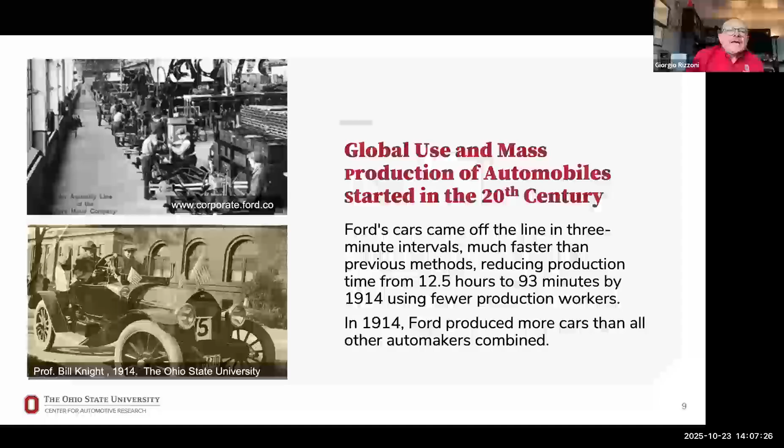Electric vehicles, back then in 1914, were actually not a new idea. First electric vehicles were demonstrated in the early 1880s. You see here some drawings. I'll show you some photographs in a moment, but you see some drawings here of the two earliest electric vehicles.

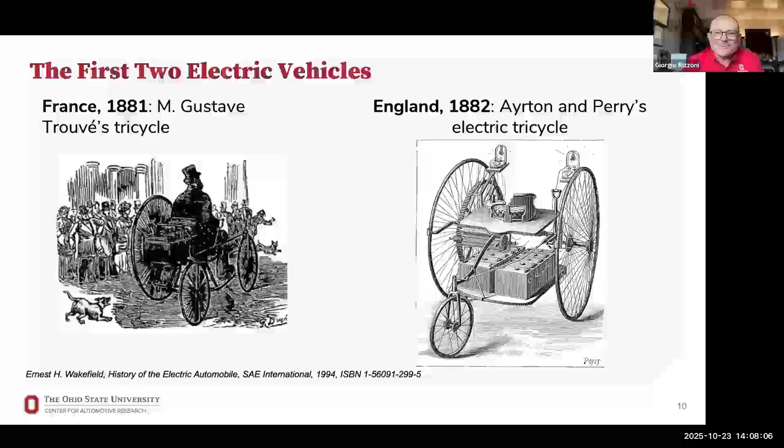And if you look at the one on the right-hand side, you can see that the tray of batteries on the bottom of that tricycle looks an awful lot like the lead acid batteries that serve as starter batteries in conventional automobiles today. Some of this technology has not changed that much over the years.

Electric vehicles moved on and were quite successful for a number of years. When you look at the early 1900s, the first two decades of the 1900s, it was probably just as common to come across an electric vehicle on the road as it was to see an internal combustion engine powered vehicle.

Here are some companies that lived probably for the span of at least a couple of decades. Baker Electric in Cleveland, Ohio, Detroit Electric, of course. And here is a picture of the Columbus Electric, based here in Columbus, Ohio, where I live. Actually, it turns out the address of this company, 561 Dublin Avenue, is not very far at all from where I live today. So in the early 1900s, electric vehicles were quite common.

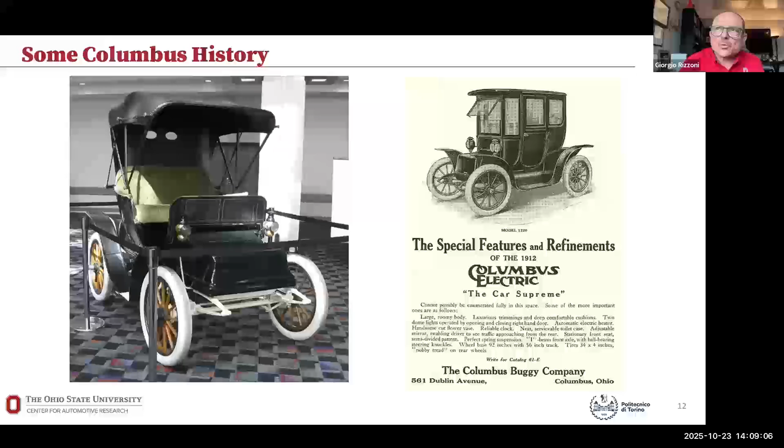What happened? How did they disappear? Well, first of all, if you look at statistics from 1913, you could buy a gasoline engine automobile for about $1,000, maybe even less than $1,000. Whereas an electric car would run in price somewhere in the neighborhood of $2,000 to $3,000. So it cost 2 to 3 times as much.

But at the time, electric vehicles were far more reliable and easier to operate. I don't know how many of you have ever operated a hand crank start for a combustion engine, but until the invention of the electric starter, operating an internal combustion engine powered car could be a bit of an adventure. They were also not very reliable.

But what happened was that in the 1910s, technology related to internal combustion engines, their reliability and their efficiency, and the availability and distribution of liquid fuels, gasoline, liquid hydrocarbon fuels, improved to the point that for the next many decades, internal combustion engine powered vehicles really dominated the market, and they were the more affordable, reliable, and effective means of transportation.

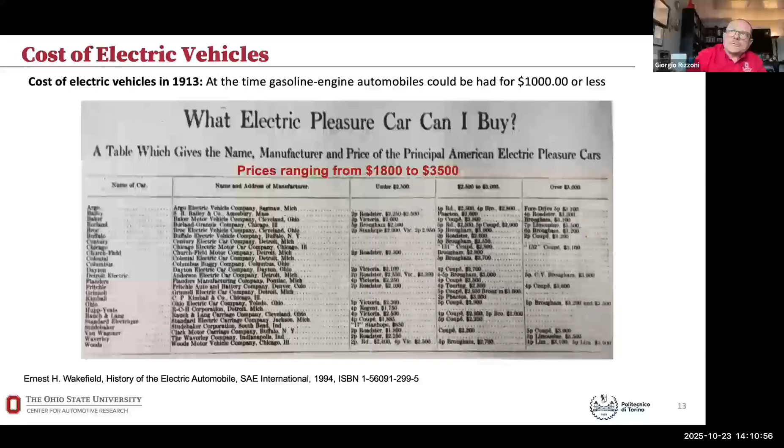So this is a little bit of the history, and of course you know that over 100 years later, today you can buy a battery electric vehicle, you can buy a hybrid electric vehicle. There are many different options available to you on the market, but for many decades, the gasoline-fueled internal combustion engine was the dominant force. Let me change topic now to the subject of energy.

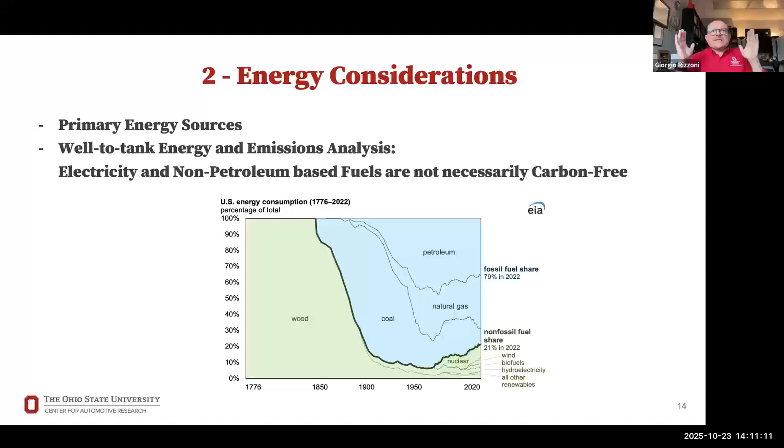Transportation, as you will see in a moment, is the single largest sector of our economy in its energy usage. And if you think about it, to provide the propulsion power that is needed for a vehicle, on one hand, you need a propulsion system of some kind, but you also need to store energy on board the vehicle.

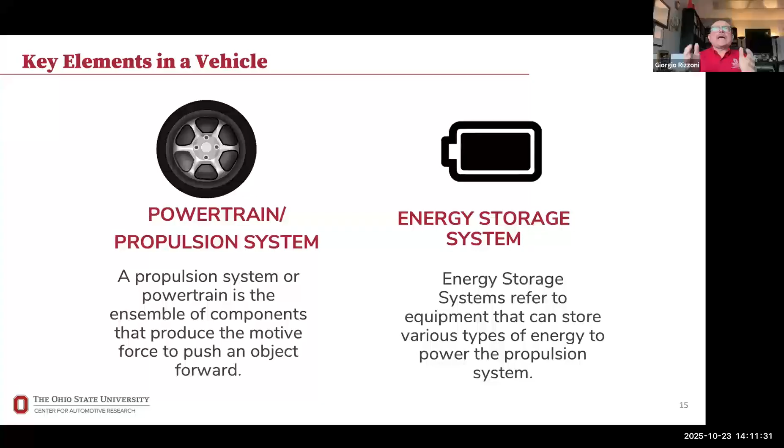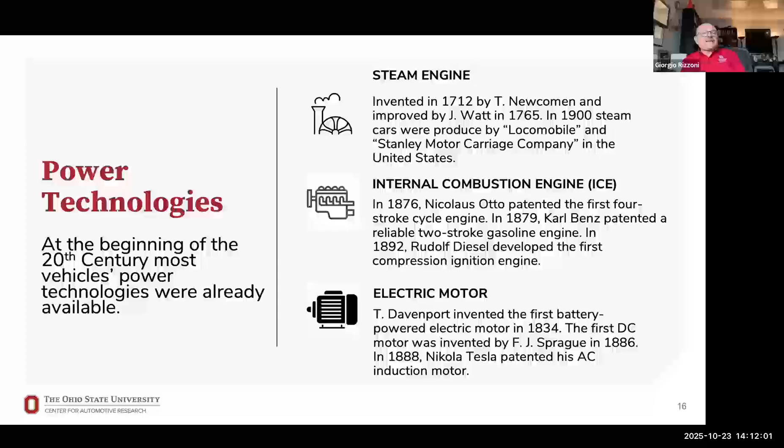And in the world of the early 1900s, late 1800s, engineers understood the steam engine. There were, by the way, in the early 1900s, steam engine powered cars as well. They were not as successful as the internal combustion engine and electrically driven cars, but they existed. The internal combustion engine has been around since the late 1800s, electric motors even longer than that.

And the energy storage technologies that exist today and existed also at the turn of the previous century were either liquid fuels for the combustion engines or electrochemical batteries. Both of these technologies have also been around for quite some time. Batteries were initially discovered at the beginning of the 19th century, actually.

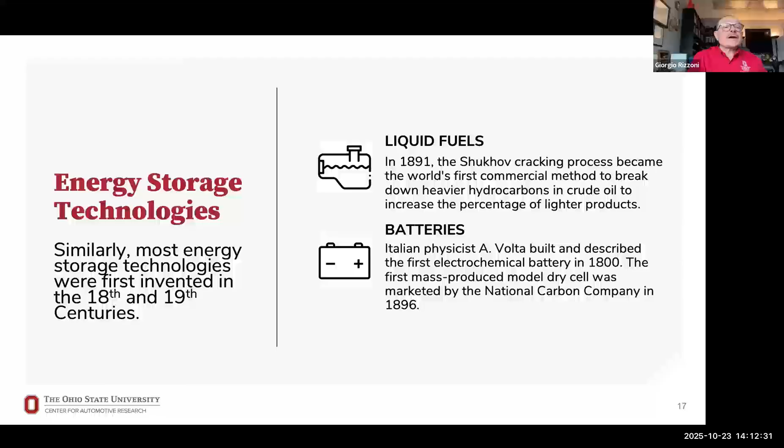So what is this energy storage or fuel for transportation? What characteristics are we interested in? Well, we need two things in an energy storage system for transportation.

We need to have the ability to store energy, and that is related to the range of the vehicles. You fill up your tank. My car has probably about a range of 500 miles on gasoline. A battery electric vehicle today, they're advertised as having a range of 300 miles.

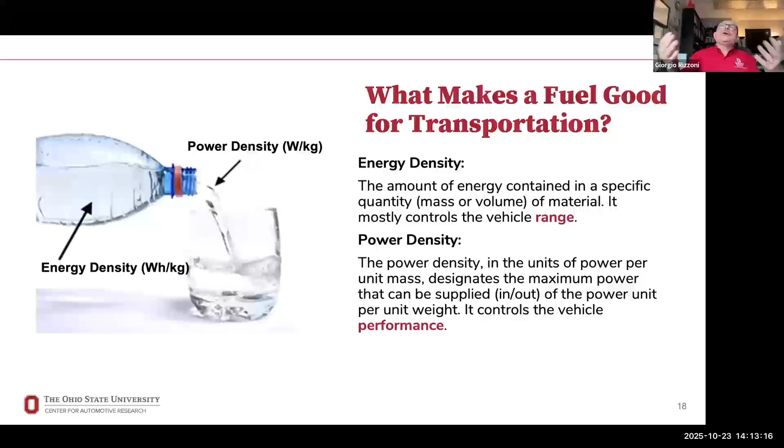But you're also interested in power density, which is related to performance, the ability to transform the stored energy into power that can deliver motion. So it's worth spending a minute on understanding the significance of energy consumption in the United States.

If you go back and look at the history of energy in this country, and any industrialized country would have similar evolution. In 1776, everything we did was based on a single sustainable biofuel known as wood. We used it for heating, for cooking. There wasn't much use of energy for transportation other than that available from wind or from animals, horses or oxen.

In the 1800s, we went through this industrial revolution, and coal became a far more attractive material for providing energy storage and for converting this energy into power. So steam-powered ships, trains, and other industrial facilities could take advantage of coal, and this led to what we think of as the Industrial Revolution.

But if you see what happens here, at some point in the early 1900s, petroleum and associated with it natural gas came to be a very important part of the energy supply for industrial applications, but especially for transportation. Today, we live in a world in which fossil fuels, petroleum, natural gas, and to a decreasing extent coal, represent close to 80% of the total energy supply in the United States, and non-fossil fuels represent about 20%.

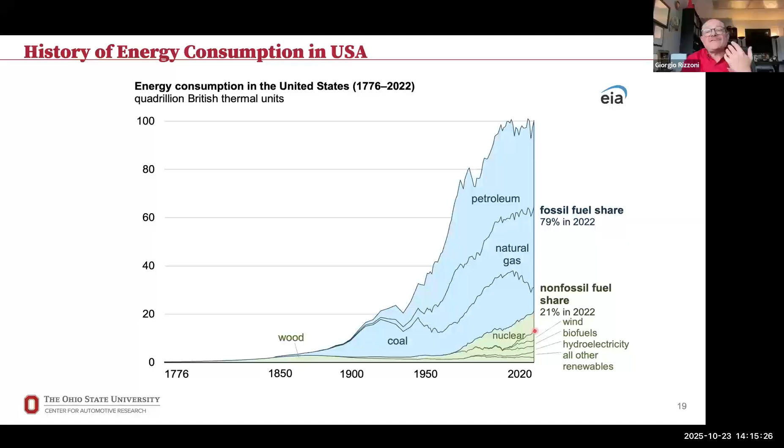And a big part of this in the United States is nuclear power. Then you have all of the different renewable energy sources. I'll show you a snapshot of the same information in percentage instead of absolute units to make the point that we went from the wood age to the coal age to the petroleum age. And today we are still in the petroleum age. I'll show you some numbers that illustrate this more clearly in a moment.

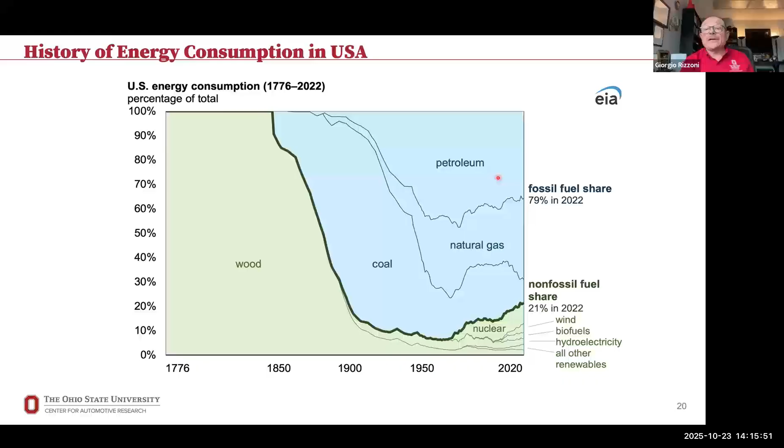So if petroleum has fueled transportation for 100 years, but we would like to move away from fossil fuels, from these liquid hydrocarbons that produce carbon dioxide emissions, what is our alternative option? Well, there certainly has been a lot of talk about electricity as an alternative to petroleum-based transportation.

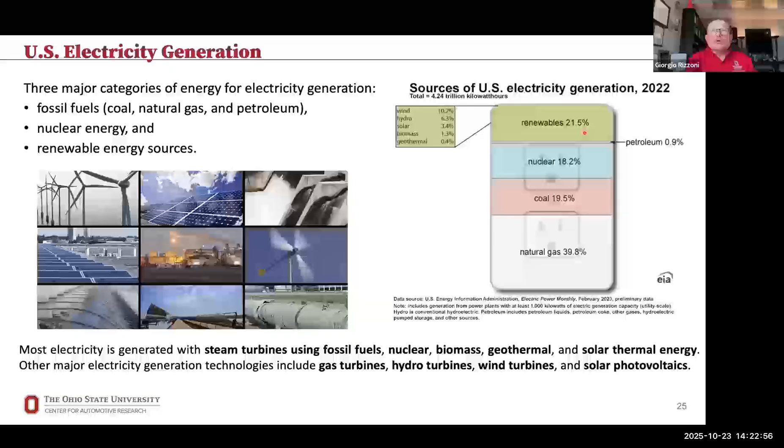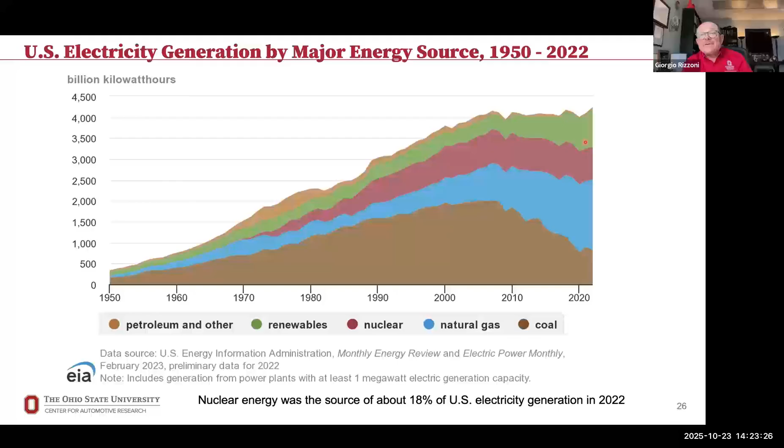especially natural gas-fired power. Here is another look at the same information over the time span from 1950 to 2022, where you can see that natural gas has grown significantly, coal has been reduced significantly, nuclear has been pretty steady over the last 30 years or so, renewables have been increasing, but this increase, again, represents only a fraction of the total.

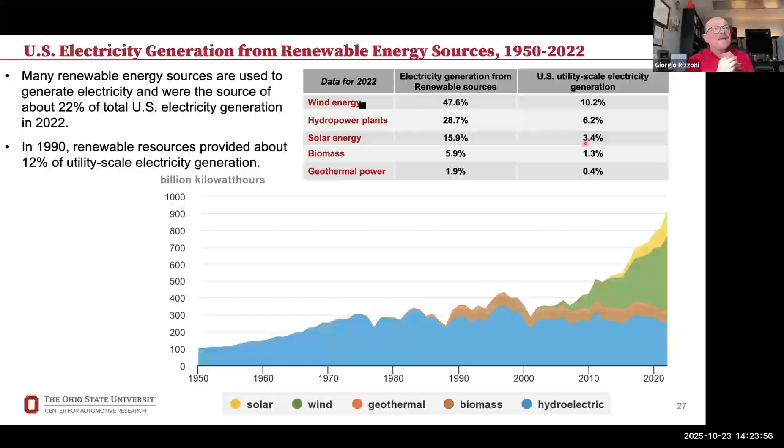So even though renewable energy production is increasing at a reasonable pace, it's still representing only about a fifth of the total energy production in the United States, which means that the day when we can think of electric vehicles as being completely disconnected from fossil fuels is not here yet. We're making progress in that direction, but we're not here yet.

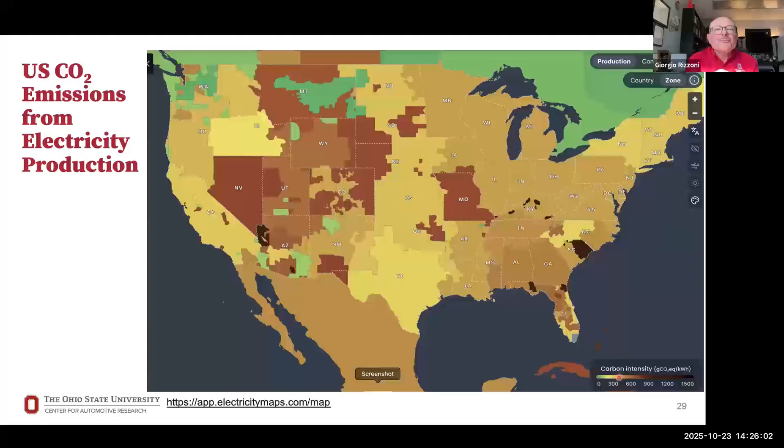So here you are in Illinois, and here I am in central Ohio. We're not too far. It's about a 4-hour drive. And we are, roughly speaking, in the same position. We are beige states. We're somewhere in between here. Not too bad, not as good as we would like to be.

And what is important to understand here is, and I picked my region, PJM Interconnection is the nonprofit company that is responsible for electricity transmission in our region. Illinois falls within MISO, an adjacent region. ISO stands for Independent System Operators. These are nonprofit organizations that manage the buying and selling of electric power, right?

And if you look at the region that comprises Ohio, West Virginia, Pennsylvania, and parts of the East Coast, you'll see that nuclear, natural gas, and coal, with a growing percentage of wind, represent the overwhelming majority of electric power generation. So why is this important?

You may have at dinner time conversations with your friends and family, someone may have asked you, hey, you're an engineer, you work in transportation. Tell me, is it really true that electric vehicles are zero emissions? And the correct answer to this question is the answer that I always recommend my students use as a first defense, which is, it depends. It depends on where you live.

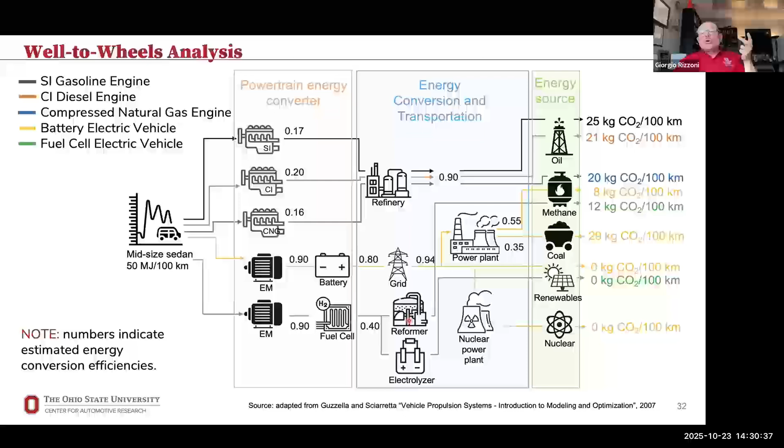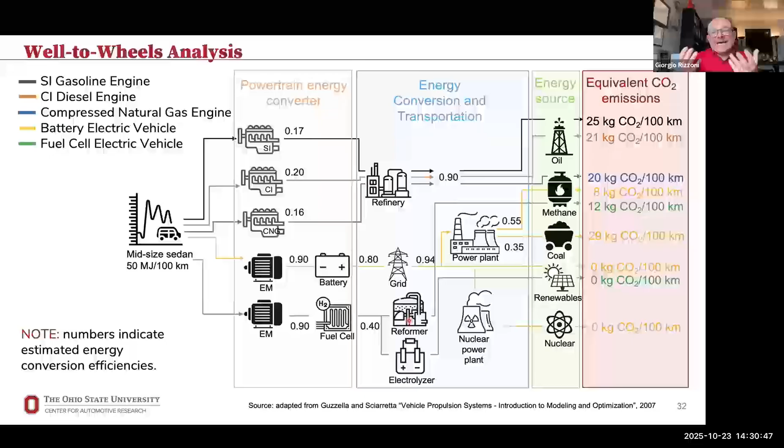And then you need to think about what's the energy source. Is it petroleum? Is it methane? Is it coal? Is it renewable power? Is it nuclear power? And then each of these has some equivalent CO2 emissions. So the answer as to what emissions are associated with a particular form of energy conversion for transportation is not a simple answer. You have to ask a lot of questions about where the fuel came from and how it's been utilized.

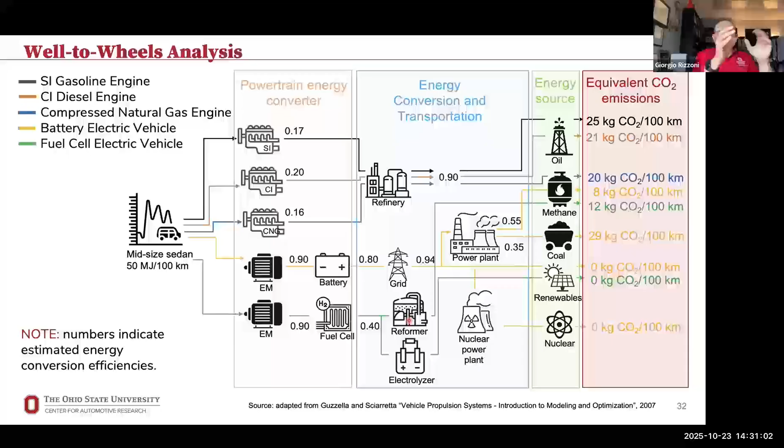This business of understanding the energy and fuel cycle and the vehicle energy consumption that leads to the tailpipe emissions. And by the way, when people say electric vehicles are zero emission vehicles, well, what they really mean is they're zero tailpipe emissions vehicles, because of course there are emissions associated with producing the electricity.

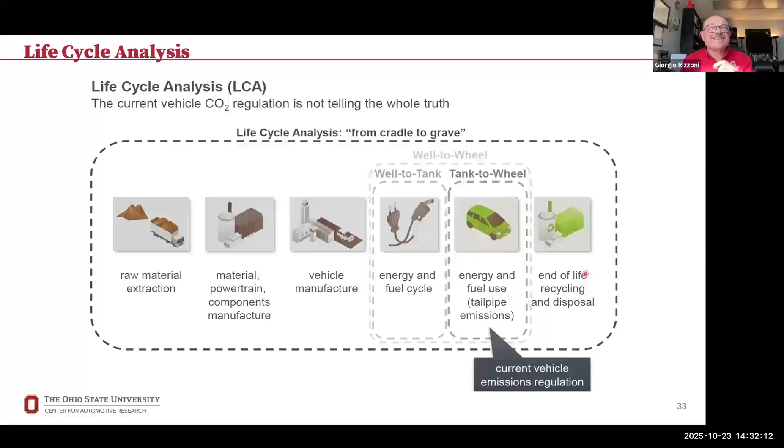But that's not the complete story, because there is energy that goes into manufacturing the vehicle, into manufacturing the components, into extracting the raw materials, and also we need to deal with the end of life, reuse, recycling, disposal. So life cycle analysis is a discipline that is quite complex, that takes into consideration all of these different aspects. So my message is the next time someone asks you at dinner time, what about the emissions of electric vehicles, make sure you remember my suggestion. It depends is a very good starting point for the conversation.

This is one of the reasons why internal combustion engines are still with us. And I think they will continue to be with us for a very long time, especially in applications like aviation, where you do need very high energy density to enable an airplane to cross an ocean, for example, or long-range truck transportation, for example.

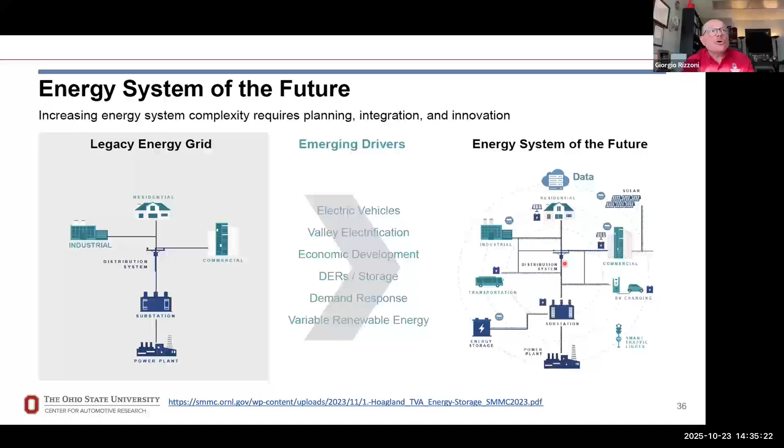We are moving in the direction of increasingly distributed energy systems. By that I mean that instead of having the simple system, you have a power plant sending electricity to a substation, you have a distribution system, and then you have commercial, residential, industrial applications. Now you're moving to a more distributed world in which you will have distributed energy resources, and you're going to have much more flexible distribution systems that allow us to actually broker the transfer of energy from one application to another in a much more flexible way. And energy storage is going to become a very important part of this.

I will also make some comments about, remember that petroleum ends up being the single largest component of the primary energy supply. So we live in a world in which petroleum is produced in certain parts of the world. These are the supply regions. And then you have consumption of this petroleum. Where? Well, if you look at vehicle density and population density, East Asia, Europe, and North America are the largest consumers. They're the regions where there is the most demand.

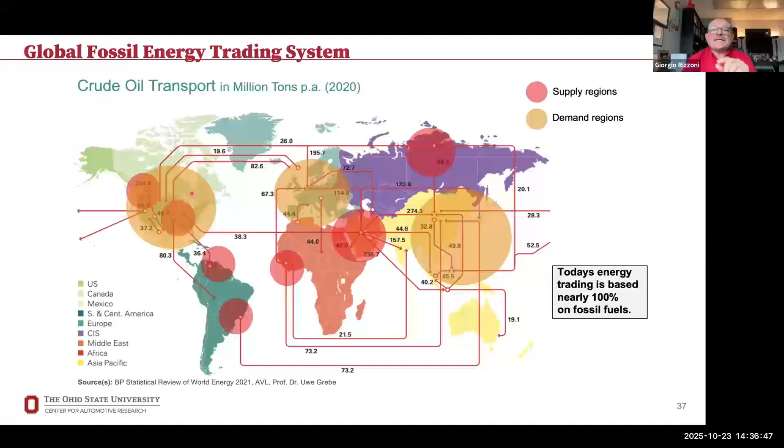And there is an amazing amount of energy trading that takes place in the world today that is mostly based on fossil fuels, ships, pipelines, and let me give you a number. Today, the world consumes 100 million barrels of petroleum every day. 100 million barrels of petroleum per day. And this petroleum may be coming from the other side of the world, and it comes to us on oil carriers, right? Or it's shipped by pipeline from Canada, for example, to the United States, or from Russia to Europe. So this idea of having a system that is based on the transport of liquid fuels is part of our world. That's what we depend on.

Could we imagine a global energy trading system in the future in which you will have the production of energy that uses sustainable energy carriers, not fossil fuels anymore? And I'll give you an example in a moment, but are there regions in which there is a lot of sunshine, a lot of wind? Could we make a lot of energy with renewable energy sources and somehow trade it? Well, a big challenge. This is not an easy thing to do. The demand regions are the same, the USA or North America, Asia, Europe. But now the supply regions could be different. They could be regions that have a lot of sunshine or a lot of wind.

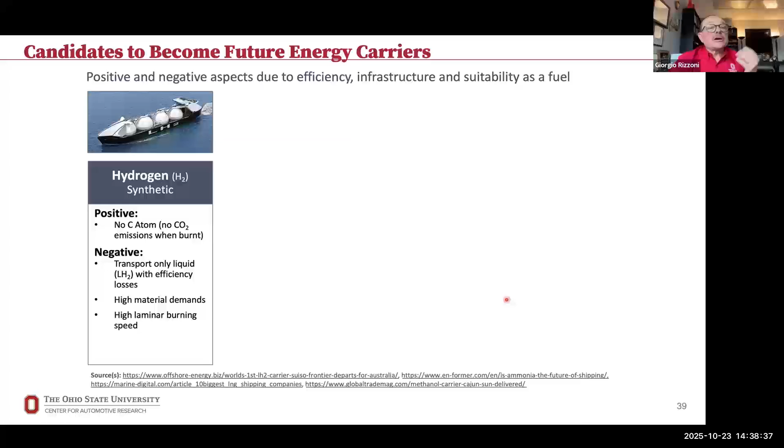Could we imagine having the production of green molecules, that is, of liquid fuels or gaseous fuels that are not based on fossil fuels, but are produced in a renewable way? So e-fuels, I'll describe this in a moment, ammonia, e-hydrogen, that is green hydrogen, are potentially these fuels of the future that are still chemically bound in molecules that allow you to move them, especially with liquid fuels, more easily. So you could imagine shipping synthetic hydrogen made somewhere in the Sahara Desert, for example, where there is a lot of sunshine, using solar power to do electrolysis for producing hydrogen.

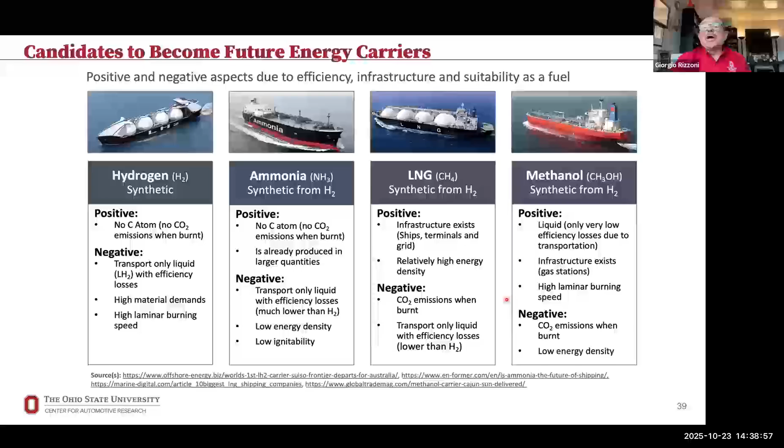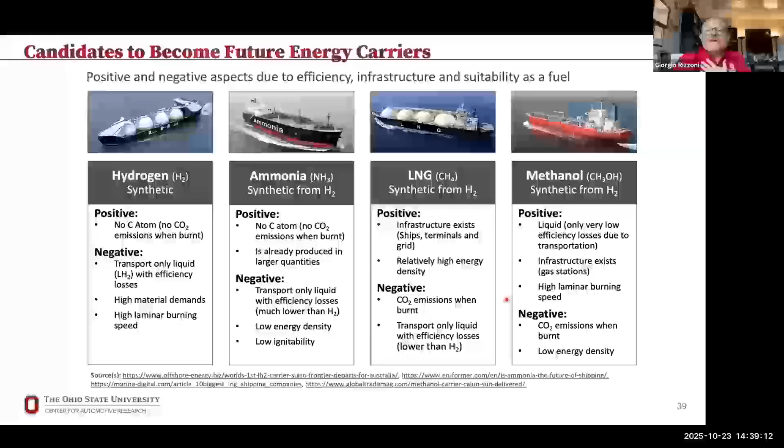Some people believe in ammonia. I'll admit that that's a difficult fuel to handle, but ammonia is a liquid carrier of hydrogen. Liquefied natural gas, where the natural gas is a biogas or synthetically produced from hydrogen, or methanol, which is the lightest liquid hydrocarbon, CH3OH, that can be produced. And it's liquid, so all of the liquid carriers, the oil tankers that we use today, could be carrying methanol. And so you say, wow, this is a nice dream. Could this possibly happen? Might I be able to supply a net zero carbon liquid fuel to airplanes that cross the Atlantic Ocean?

Well, Siemens Energy and Porsche teamed up with the government of Chile. It turns out that the southern tip of Chile, Patagonia, is the windiest part of the world. And what they've been doing there is using this wind power to produce green hydrogen from electrolysis. So you need water close to the coast. You need lots of wind to produce clean electric power and carbon capture.

So imagine capturing carbon from the atmosphere, synthesizing this carbon with hydrogen that is produced by a green energy source, and synthesizing this into a liquid fuel. And methanol would be the easiest product, but methanol could be refined into a designer gasoline.

So I believe that as we go forward, we will see more and more emphasis on substituting these liquid e-fuels for petroleum so that we can continue to use liquid hydrocarbon fuels in difficult applications like aviation, agriculture, construction machinery, long distance trucking, while at the same time translating a lot of the internal combustion engine powered local transportation in urban areas, small package delivery, passenger cars into electric vehicles.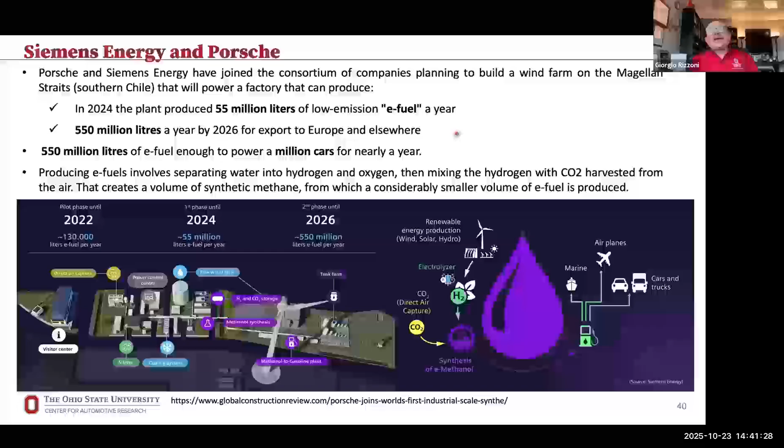I think that in summary, we need engineers who are capable of doing life cycle analysis, who are capable of doing the chemical engineering and synthesis of these e-fuels and contribute to the design of an increasingly renewable energy focused electric power generation system.

Yeah, that's a good question. Let me go back to that slide. Excellent question. Someone is paying attention. This is a question that has plagued me before when I have given similar presentations. I'll explain why. So, first of all, rejected energy is related to energy losses. That is, the laws of thermodynamics are what they are. We cannot change them, right? So every energy conversion process leads to some losses.

Let me give you an example. I make electric power from a natural gas-fired power plant. Well, the combustion process is not 100% efficient. So I put natural gas that corresponds to a certain amount of energy, megajoules per cubic meter, for example, and not all of that energy becomes electric power. Then this electric power, I have to transform it from low voltage to medium voltage to high voltage. Well, the transformers have losses too. And so every step of the way, I lose some of the original energy. So that's the rejected energy.

When you look collectively at all the losses, think about your home, okay? If you live in a home that has very poor insulation, your heating costs are much higher, but you're also using a lot more primary energy to heat your home, right? So one of the messages in this rejected energy is that improving the efficiency of everything we do is of fundamental importance, and engineers are essential to accomplish that goal. All kinds of engineers it takes to do it right. So how do we improve insulation in our homes? How do we design electric machines that move pumps, for example, or fans in buildings? How do we make them more efficient so we lose less energy?

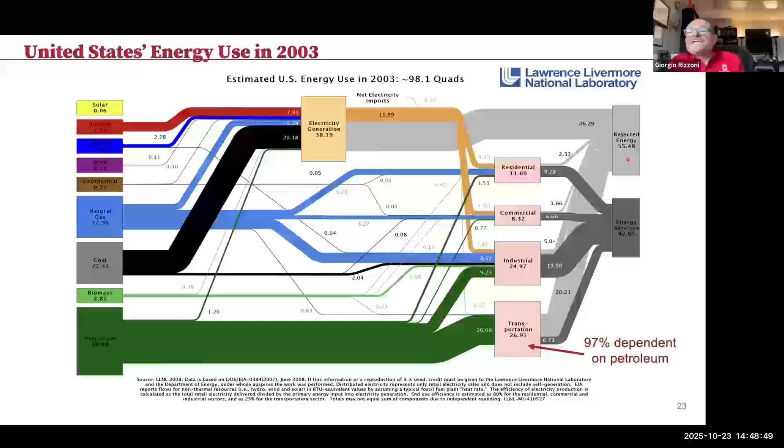Now, the second part of your question, what may have happened, is that, my goodness, you say in 20 years, we went from rejected energy being 55 out of 98 to being 67 out of 100. Are we becoming less efficient? So I actually wrote to the folks at Lawrence Livermore, because one year this number changed, and the answer was that they changed the way in which they calculate rejected energy, and without knowing all the details, it's very difficult for me to explain in a minute how this works. So the discrepancy between these two percentages is due to the methods they use to calculate it. But let's say that they do a better job in 22 than they did in 2003.

What this is telling us is that in the end, the overall efficiency of everything we do with the primary energy sources we use for residential, commercial, industrial, and transportation functions is really only about 33%, 1/3. So 2/3 of the energy that is available at the source is, guess what? It becomes heat, right? So we are essentially increasing the entropy of the universe by converting energy for our end use applications. My point continues to be that anything we can do to improve the efficiency of energy conversion is an important thing to do. So more efficient internal combustion engines, mechanical transmissions with lower losses, hybrid electric powertrains that improve on the efficiency of internal combustion engines. These are all things that we need to keep working on.